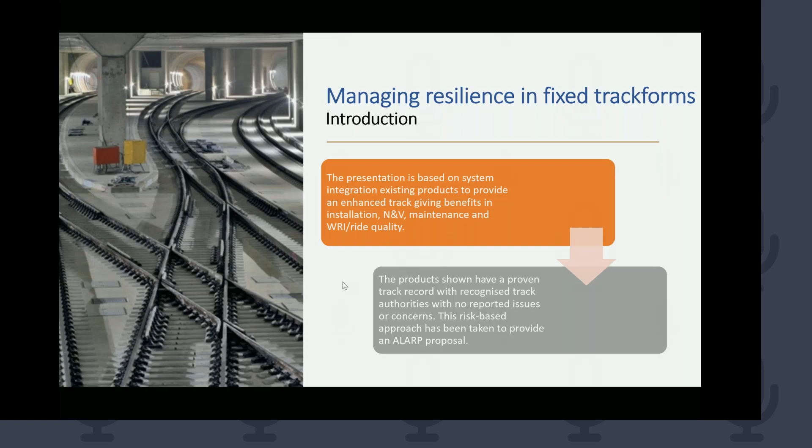Right, so what I'm going to do is an overview of the system. Basically, I'm looking at the Delkor system because, A, they pay wages, being brutal about it, and B, it appeared to be the best one when we reviewed it on LU at the time.

So what we're looking at here is based on integrating existing products. All the stuff out there is proven, and making it better, making the railway better, both in noise and vibration, maintenance, ride and quality. As I said, they've got a proven track history, so most of this stuff is well known worldwide.

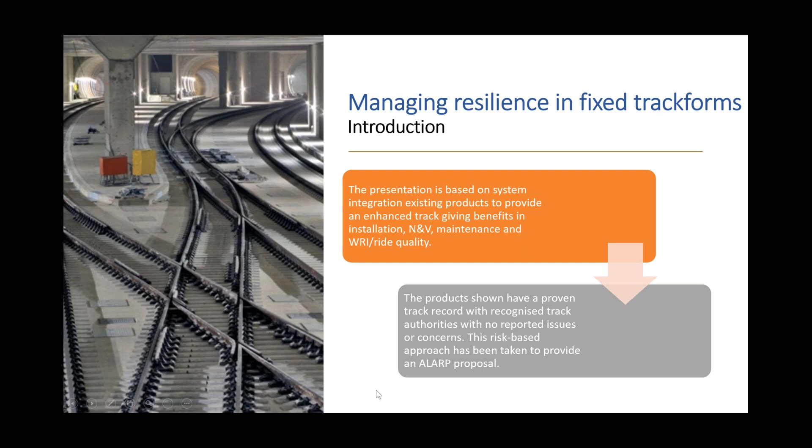Right, if I can get my computer to click in. Right, so I'm going to whiz through the vibration side of it pretty quick because that's something that should be well known to a lot of people, and then I will go through the other bits that we tend to forget about: resilience, how to look at stress, how to manage between different track forms, interfacing into legacy, and the maintenance liability that we've got.

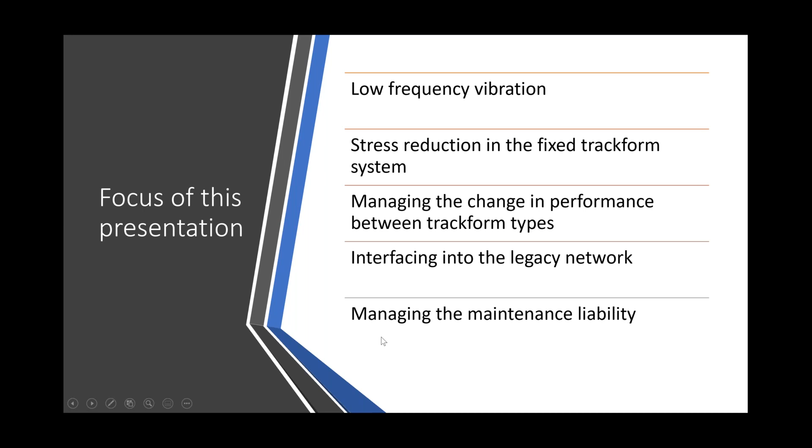This is a basic overview of what we've got in the way of different types of vibration. There's primarily two types: airborne noise, which is your wheel squeal type, which is a high frequency. Resilience won't manage that to any great extent, but the big one is structural borne vibration.

That tends to go through the clays or the concrete into the foundations of properties, and then the property acts effectively as a loudspeaker, and you get this low dull rumble, which since the advent of Crossrail and setting the bar really high has become a major problem within the urban area.

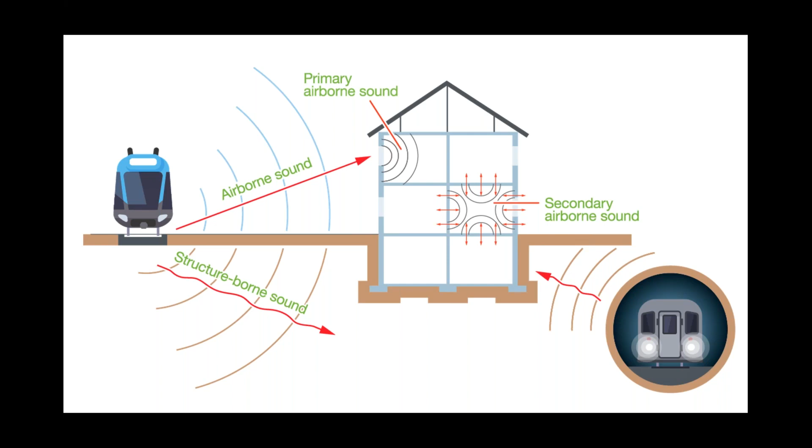Just some idea of the cost of it. We all know the cost of on-site issues on rail management, trying to keep your alignment and rail head profile in a good condition to reduce the input factors. But the legal cost is starting to become a major issue on this.

The 35 dB on that graph, you can just about hear it in a basement, and as it goes up through to 55, that will be a real painful noise. The magnitude increase is vast.

Obviously, the legal cost depends on the area you're working in. West End of London, that can be in the millions, whereas some of the less affluent areas, obviously the cost will be less. But it is a major problem on this, and we should start factoring this cost into our renewals, because it does have a big effect on the global business, not just the localized maintainer.

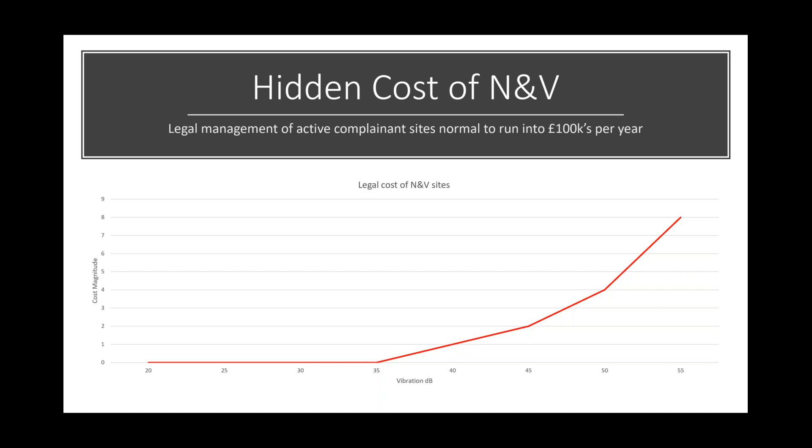A quick review of what's out there. So direct fixation would be your standard PACT track type arrangement, or a concrete in base plate. Basically doesn't give you a lot, as you would expect. Embedded rail, which is the Edilon type of system, and tram type system, will give you circa 5 dB. It does have a bit of disbenefit on airborne noise because of reflection.

And then we come down to the compressive type base plates, and the Sonneville type system. You can generally get about 10 dB, and then we go to the resilient Lord egg, Cologne egg type arrangement, which we have got down to about 14. And then after that, we go to the two types of floating slab track.

Generally, base plated type systems, you can usually get the price about the same. So when you get a real magnitude shift in cost is when you go to floating slab track, both in maintenance liability and one-off installation costs. So it's worth thinking about what you're doing there, but you've also got to align this into the system.

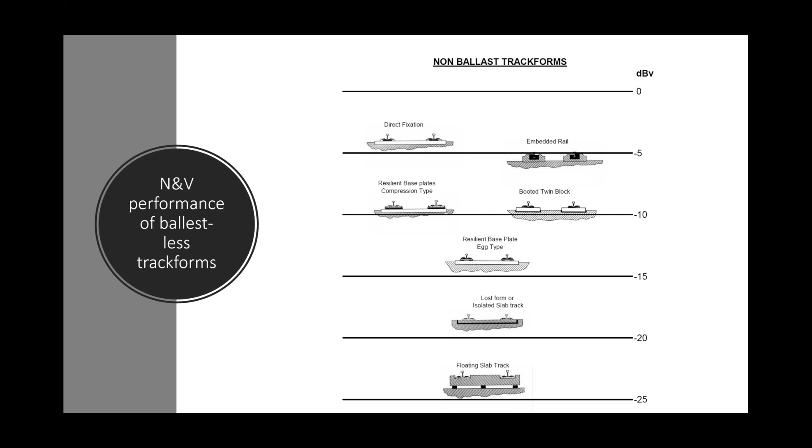So, right, managing the resilience in the rail system. So you have a rail, obviously, and you not only want to get your noise and vibration down to reduce the input factors into your vibration modeling, but you also want to understand what it's doing to your system and ensure that we don't end up with a heavy liability of maintenance or major renewal costs at an early date.

So, as an industry, we're pretty poor actually at looking at resilience. We tend to think of it as the rail only going up and down, and experience has shown the tube network has been a brutal area to try things like this, because the sharp curvature, compromised transitions, etc., do bring out faults really quickly.

So you've got to look at the lateral forces, lateral movement as well. The other thing you've got to look at is preload of the system. If you get a very soft bit of rubber and then put 14 kilonewtons on it, you've obviously lost a lot of the effect of it, so you're taking out a lot of the use that rubber can give you.

It also has an unwanted effect that we experience quite often on some systems, where because you put a preload on the rail, you've taken out that initial compression. So with a system like this, you end up increasing the bend radius from about 2 to 3 meters up to 8 or 9 meters.

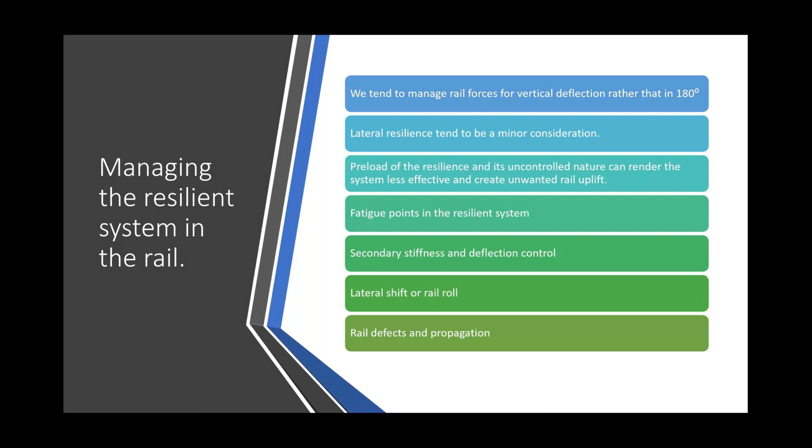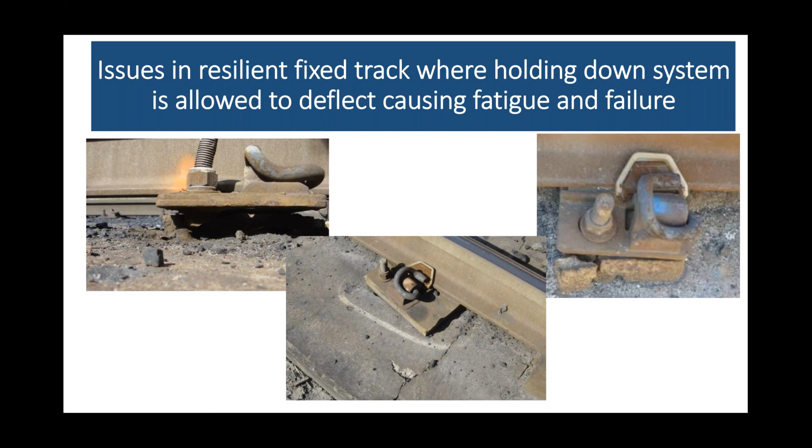The next slide is a classic which we've probably all seen, anybody who's worked with slab track. In this one, I think it's in Germany, they had a 15mm pad in there - it's literally destroyed the pad. The bolts, you can obviously see, are completely under fatigue and the concrete's broken. The other failure mode we get quite often is that the clip fails because you're overstressing it. This is what I was talking about with fatigue points going through and managing your lateral resilience. Unfortunately, being a fatigue cycle, it all tends to happen at the same time - so we don't just get a one-off break, we tend to get what we call an unzipping effect.

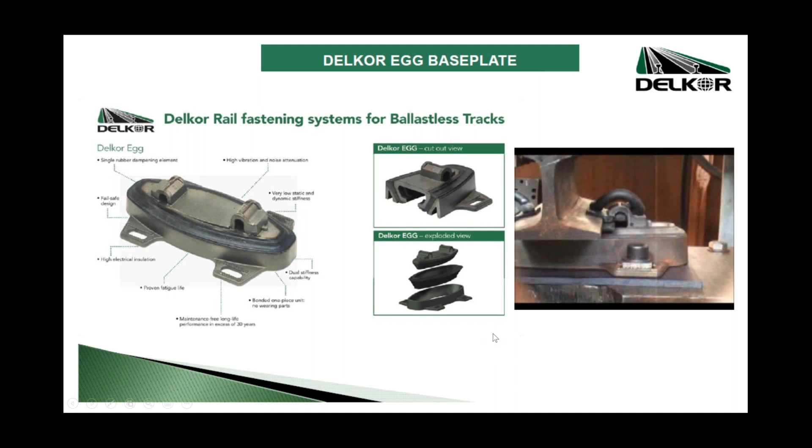Plunked on a 200-meter radius curve, it's performing really well. But the next stage up, really, so that the Delkors can meet the requirement, is a pure compression plate.

Again, it's a two-part system, so you've got the top metal plate and the bottom outer ring of metal, and then you've got the rubber that is bonded to it, chemically bonded to it, in the same process that you do bridge bearings.

You don't get quite as good vibration attenuation on it because it's a compression plate rather than working in shear, but it's pretty good because you've got no preload on it. It's a captive type arrangement, so in the very rare event that something does go wrong, which I've never heard of, it won't pop out of its system because you've got the ears that curl over the top.

As far as the track guys are concerned, it is basically a base plate. There is nothing else in it, nothing else to do to it. It's just screw down and go for it.

It's in Australia where they first produced this one. It's been in service on, I think, 40 million ton per annum, 35 ton axle load, no issues. So it's got very low cost.

The Americans are using it as well. They put it on their test track and can't break it either, which is quite good. The stiffness goes down to about 16, but that's stock dependent.

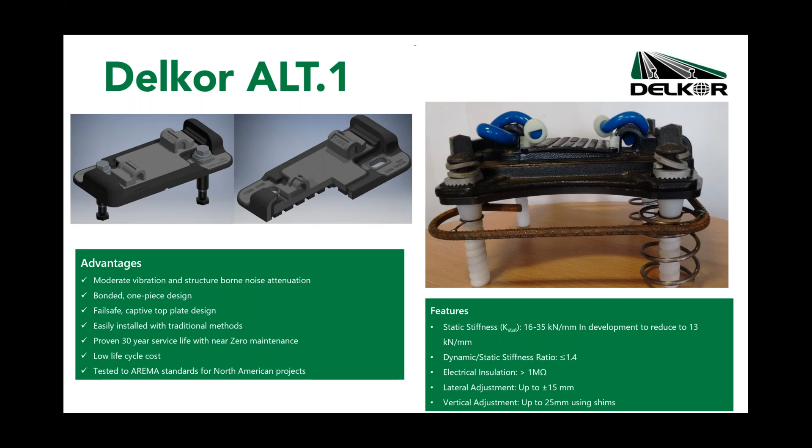I've gone over most of this, but I just revised no fatigue point, which is one thing. Again, this is dual resilience, so once you get to a certain point, the rubber won't compress any further. That's both laterally and vertically, so it just goes solid. Again, it won't affect the plate. If you run a 35 ton axle load over it, it just doesn't operate to its performance criteria.

We reduce peak loading by the load share. As I said earlier about the bend radius, you can actually get the loadings down to about 40% over the wheel. It's natural rubber, so it gets stiffer with age.

So although the performance will degrade in time, you're normally looking at getting 40 years plus out of it. It stiffens, so there's no safety risk in it going too floppy.

The whole system was designed using existing tooling, so we keep the same maintenance process and reduce the interventions because we've got the reduced stresses. It's 40 years in places.

DLR, we took some out, did some testing on them. I think they've been in about 32 years around Canary Wharf, and I think the degradation was about 4%. We allow 10%, so yeah, there's massive life still left in those, so they're still going well.

N&V performance, we can tailor it. Obviously, dedicated stock, it's very good. When you get mixed traffic, you've got to compromise a bit, but we can still get a very good performance. And it's very compact and ideal for constrained railways. In fact, with LU, we couldn't actually fit anything else in.

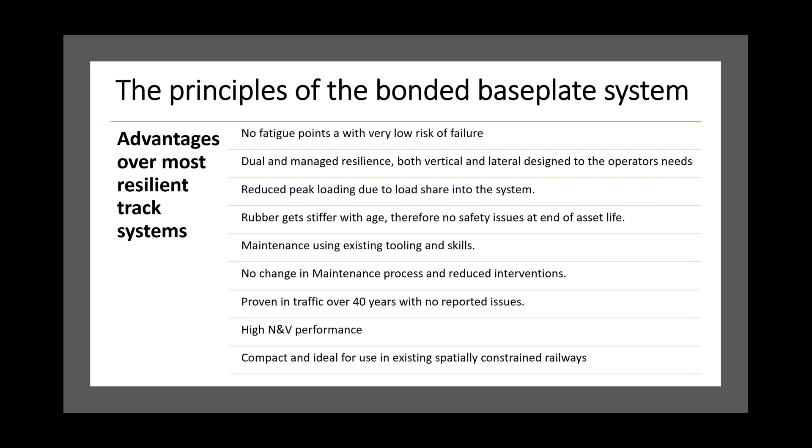This is a slide. I won't go through it in detail because it's a bit heavy on the eye. It's a good one to go through afterwards.

You've got the checklist, which is your input parameters up in the top, so you put all your track details and vehicle data in. The calculation results will give you that deflection curve. This particular one was done to fault mode criteria to work out the worst case scenario. So that is worst case scenario.

Don't take that as a given that you're going to get 2.5 millimeters deflection. You're not, you're going to get probably about 1.5 mils, which is perfectly acceptable under a bend radius of 5 or 6 meters. No problems. This is a relatively soft one, 13 kilonewtons per millimeter.

If you look on the line from the side coming down there, nominally 63 is the frequency, which is 47 on that, giving you an absolute insertion loss of 10. So it's pretty good, it's up there with the best of them. But I'm not going to go into details, otherwise I'll bore you to tears.

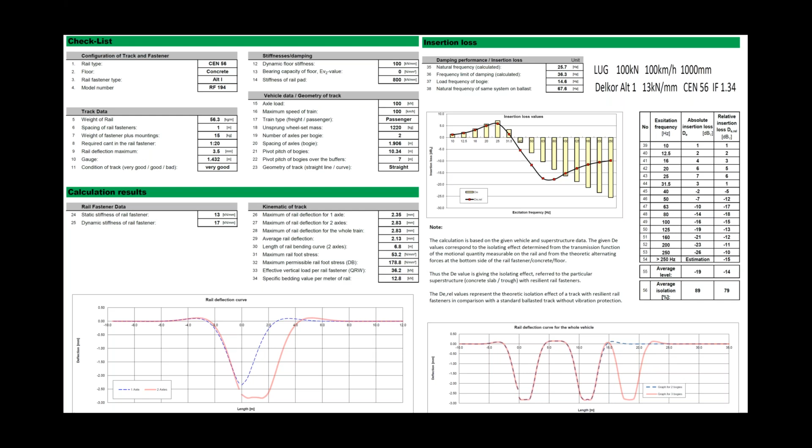As I was saying about the bend radius, this is what you see under a base plate. This is indicative, it will change with how you do it, with load and stiffness, but it's not unusual to get well below 50% by increasing your bend radius. Normally in a base plated system with a conventional EVA pad, you'd be looking at about 75-80% on one, and then the residual going between the two.

On some of the softer systems, we can go out to about 6 plates either side of it by utilizing that, which shows that you can get your fatigue loading right down, which is one of the aims we need to do - to keep that fatigue loading low so that we increase the life of our asset.

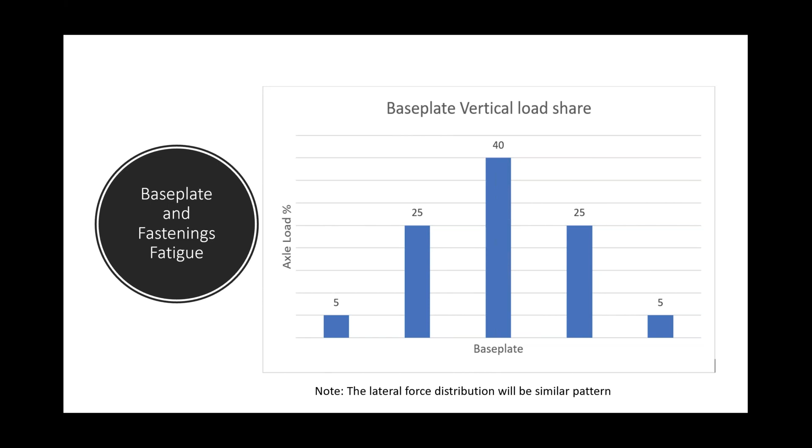I did cheat on this one and just copy it in. So what you've got is the vertical forces, they go through the top plate into the rubber. Because the rubber is resting on the concrete base or whatever your formation is, you create a really high friction on that concrete, and that holds all your lateral forces.

So we've reduced the lateral forces, plus by pummeling that rubber down on top of the concrete, we're actually holding most of our lateral forces from going through the bottom plate. So we are keeping the fatigue out of there.

We did some FEA, and on the central line we modeled Caxton curve, which is a 60-meter radius curve - I'm trying to think what speed it was, but I can't remember. What we found was on this 60-meter radius curve with central line stock, which is horrible for track, we actually still found that the preload from the bolts was causing more stresses than the train going over it. So that was very reassuring, compared with the legacy system where we were getting something like 100 kilonewtons going down in the system.

And effectively the whole bolts were under fatigue straight away. The rail fastening system, whatever you have on top, it actually gets a lot less stress because you're not rolling the rail over, you're laterally shifting it in rubber. So you'll find that whether it's a bullet system, Pandrol or Vossloh, you won't get any faults in there. They would last for donkey's years.

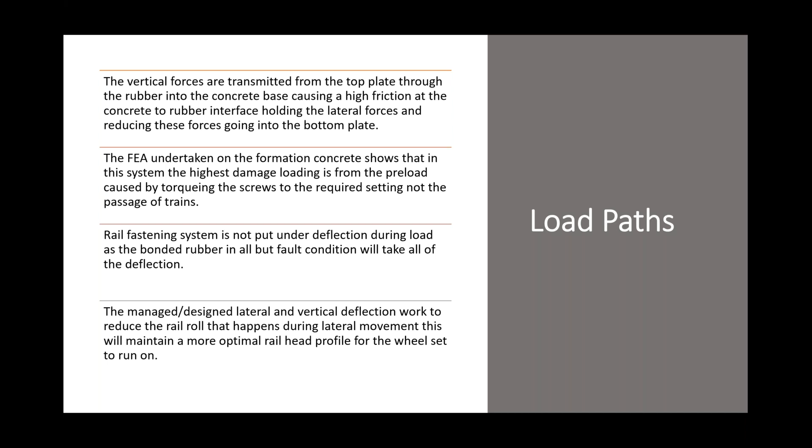With the lateral movement, obviously, it's going across, you maintain your railhead profile a lot better. As I said before, you tend to find on this system - it's a very big subject to go into, but I will just touch on it - because you're damping everything out, the railhead damage generally is reduced.

There are certain conditions if you mix up natural frequencies, which will happen with any track form, where you can get problems. But again, that comes down to something which, as a system, we need to look at and assess beforehand. Sometimes you're led into it and you just can't avoid it. But it's unusual, and it's only happened to me once on the central line, and that was due to conditions. But there are ways that we can play with that in the longer term.

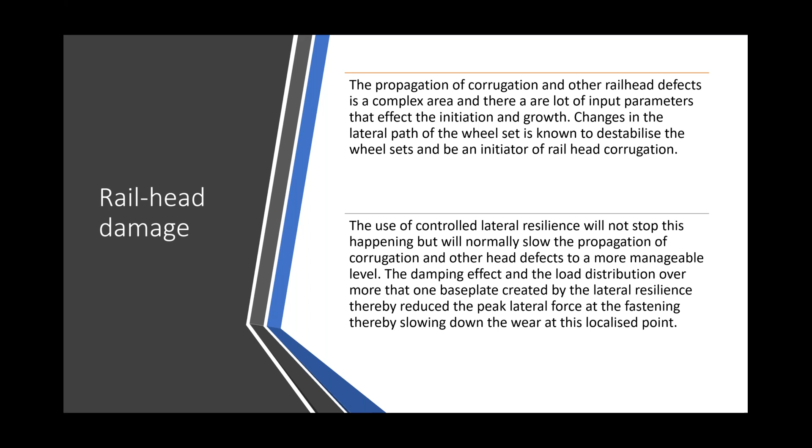The other thing coming from resilient systems is, you want to manage your stiffness back out again. There's no point putting a lovely new system in that manages all your stiffnesses, and then you get back to your traditional system and go wallop straight back in, and just move your maintenance liability from one area to another.

This was done in Australia, I think it was in the 90s, hence the PPE is a bit more lax than we would see nowadays. So you can see what they've got there - they're running out the Delkors off the bridge and then into the PNC sleepers, which have different stiffnesses of rubber to slowly manage the stiffness back out.

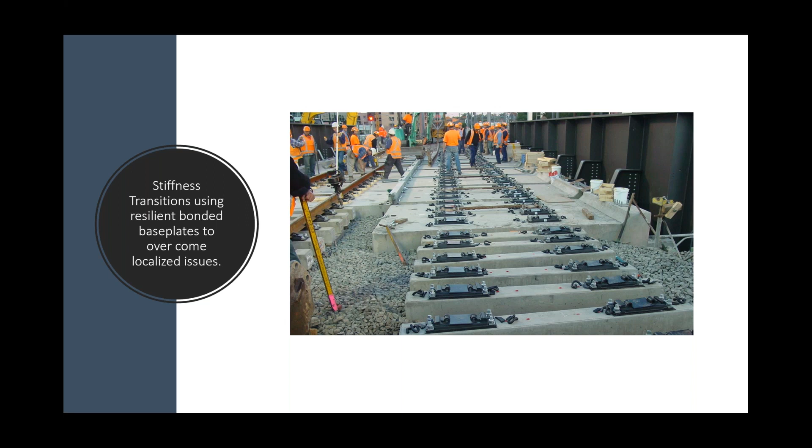This is what we designed on LU. The LU design section came up with this, and so what we've got here is a selection. We come off the track form with the 20 kilonewtons, and then you have a section of 22 kilonewtons on very wide concrete sleepers that then go into 30 kilonewtons and then run it out through.

The idea is that we use a bend radius to change the stiffness, so we don't have to change every single base plate. We can use the rail to assist us in that. As it goes through, we get a slightly different stiffness as it runs through, and we can run it through and keep our rate of change of deflection down to a minimum.

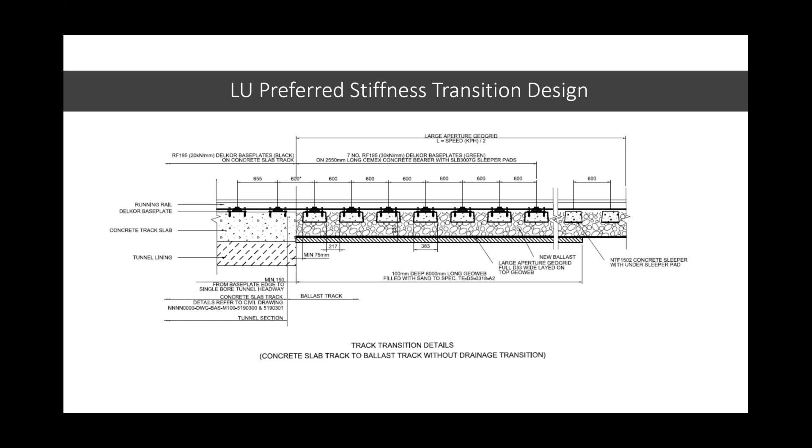One thing which we have to remember is that it's speed related. So the faster you go, the more you got to put in there because it's rate of change per second. The advantage of these stiffness transitions is that there's no intrusive works.

You bring it all on site as you would as a panel, dump it in there. We tend to put a few geo cells in there for belt and braces, but basically we're not gonna rip out, have major concrete structures under there. It's all up and above the sleeper that's the bit that's moving, so that's where we keep it out of the way.

We've got a wide sleeper, so that helps as well. And the other thing is that there is a great love of changing the stiffness on a slab track, where it does seem a bit naive to me that you spend all that money working out what's the optimum for your slab track, and then the most critical bit is the end, and then you start playing with the stiffness on the end. So I always prefer to run it out and then change it back into an area outside of that, in the ballasted area, where you've got a bit more control, especially if you've got noise and vibration, because you stiffen it up on the end, and that then just livens the whole slab up.

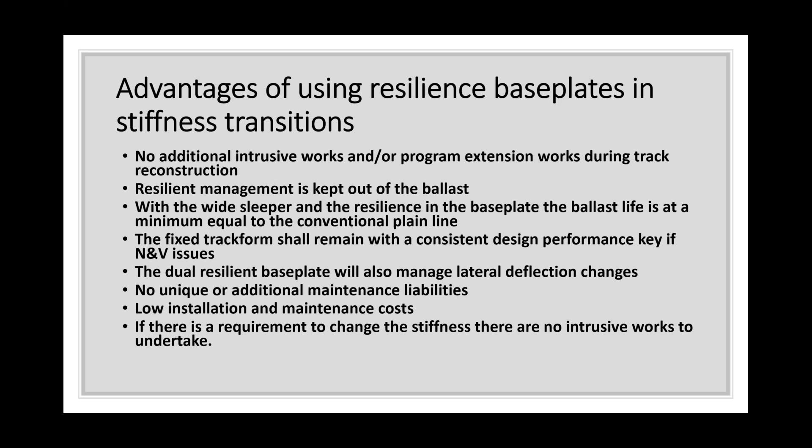Here are two that we've done on two different networks. The dark fadey picture is on the Metline. I think that's been about 5 years. As far as I'm aware, I did ask the other day, no issues. The other one, which is obviously a lot longer, is on near Canterbury, River Stour. That was put in May. We did some vibration testing the other day, and it's performing well. So they're the two types we do: mainline operator, mixed traffic, and dedicated LU stock, S-stock.

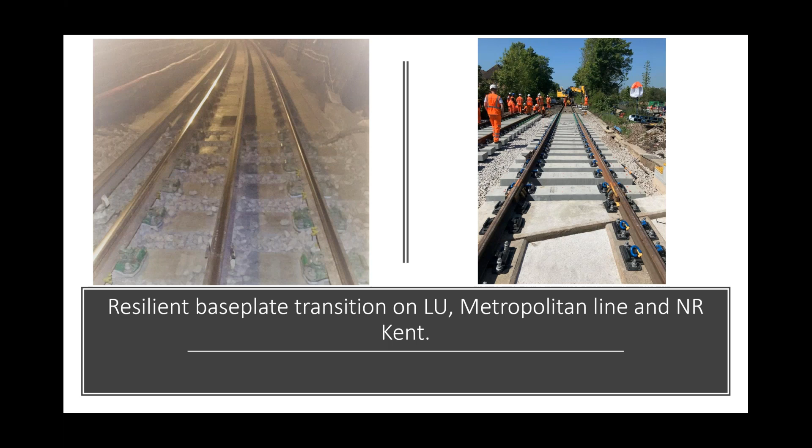The other area of fixed track forms that we sort of see coming to the fore at the moment, where we're changing from softwood stroke hardwoods to FFU, or hopefully at some time move away from FFU to concretes and steel. This particular picture is Sydney Harbour Bridge. It was done in the 90s. Again, it's just up for replacement because the timber underneath it was failing, not the system on top of it, and it's a line system upgrade. So at the same time, they're changing the base plates.

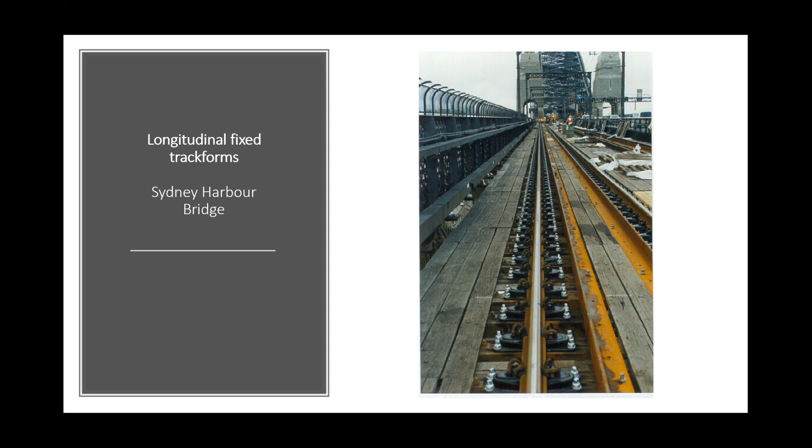Historically, we always used to have marine softwood, brilliant timber. Used to last for donkey's years, and it was also quite flexible. With the demise of good quality softwood, we moved to hardwood, and latterly to a plastic composite or FFUs. This is Network Rail, using extremely stiff, completely different sort of way it reacts with the chair screw.

And they do suffer from, when you have peak forces, the screws do tend to fail, or if in hardwood, the top surface of the timber starts to fail and the holes go oval. I think anybody who's worked with long timber bridges will know they have their own anomalies and history of failures, etc. And the peak forces do tend to overcome the friction between the base plate and cause screw failures, etc.

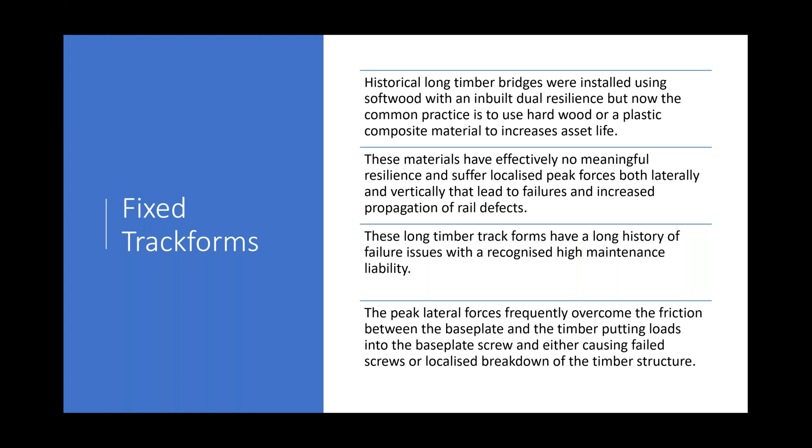So by using resilience, especially with the lateral resilience, we do load share laterally as well as vertically, so we can actually reduce the forces going in. And again, as I said before, the vertical forces do actually compress straight into the timber stroke composite, creating high friction and therefore reducing the force in the screw.

I'm a great advocate of looking at replacing timbers with steel or concrete to get a structural form. It tends to be awkward because it's a multidiscipline design, as it brings the civils guys into it.

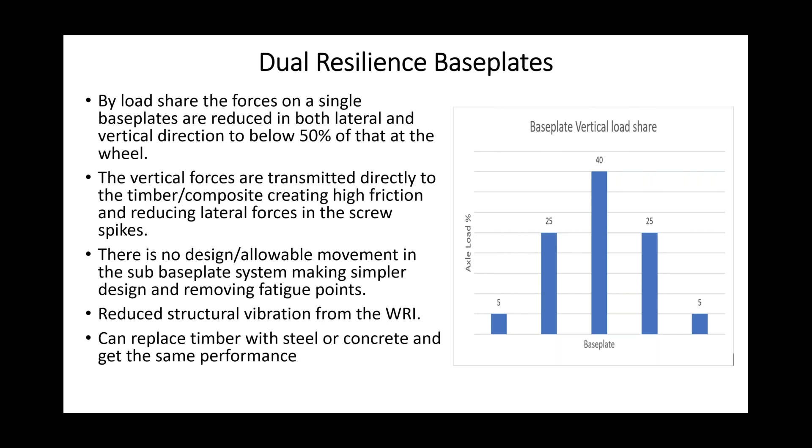I know it's been done with the Viper system, and I think that's working pretty well on a few of the bridges. I haven't heard any major issues, but with the cost of FFU and the lead times, I am seeing projects coming on for FFU being replaced with timber because they can't get the FFU.

We end up with a bit of a compromise design solution at the end of it. The use of resilience in conjunction with stiffness transition does give you an enhanced solution. You usually get a better cost out of it as well, and we're also looking at keeping your maintenance liability down.

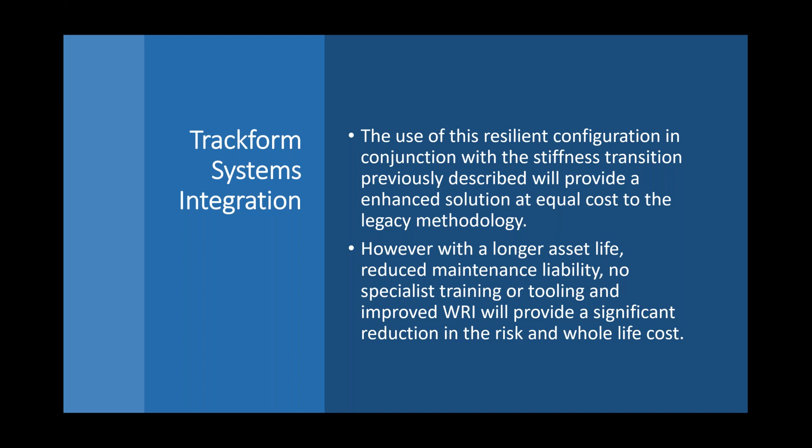This is really going off piste, but I'll talk about some work we did with LU. With the check sleeper arrangement, since we've gone away from bullhead we've ended up with a very good system, but it does suffer from issues of fastening systems to the concrete or the timber.

Because of its stiffness, one of the things we looked at within LU was providing a resilient system on a concrete sleeper, so that we could again use that bend radius to reduce the peak loading in the system.

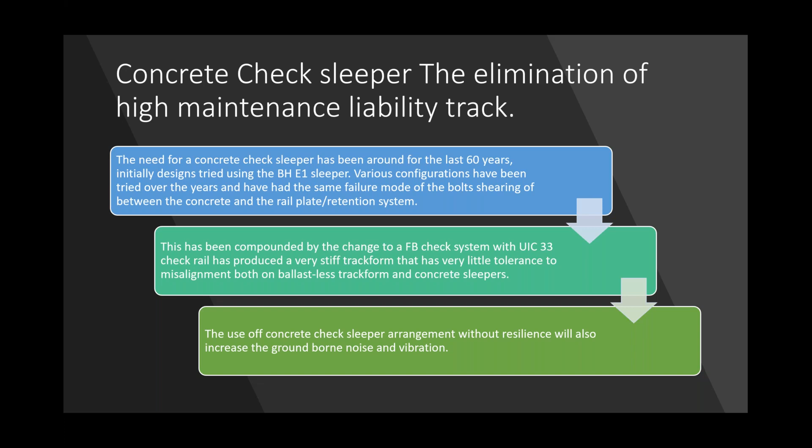This was our first trial effort, which worked well. I think it went in about 7 or 8 years ago, and as far as I'm aware, apart from its follow-up tamp, it hasn't shifted.

We've also used this in my days in LU on the deep tube. I think the tightest radius we got down to was a 90-meter radius curve. Every site was handed back with very little defects, which wasn't always the case before when the maintainer wouldn't accept it.

To my knowledge, because nobody's moaned at me yet, they're all performing well with no issues. If there are problems, please somebody get in touch with me.

What we did here, we integrated the Schwihag top plate - I worked with Schwihag and Pandrol to get this design, and then integrated it into the Delkor base. So we kept the known system of the Schwihag, and we balanced the loads between the Schwihag clip and the Pandrol clip to get an equal toe load, then put it on a Delkor-type system.

There's quite a lot of these on the system now, and it's actually one of the few resilient plates made in the UK - there's a Czech one too, so that's quite a novelty nowadays.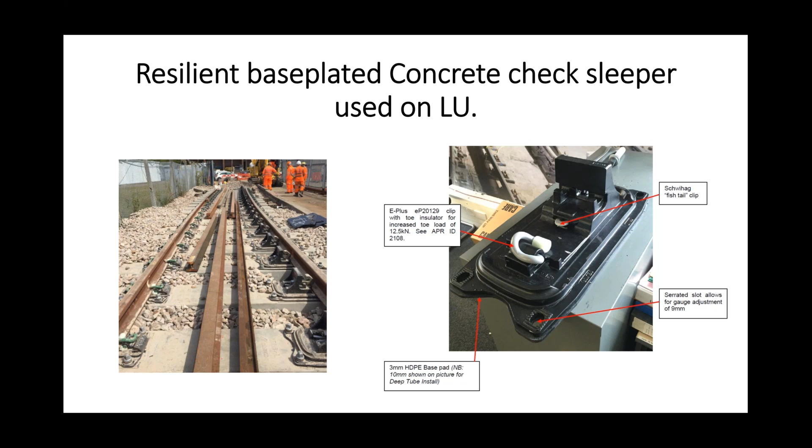We're looking to increase the asset life on this from the nominal half-life you'd expect out of a check curve compared with the plain line curve. We're hoping to double it, reduce railhead damage or the speed it appears, and share load between sleepers, meaning laterally we can hold our alignment a lot better.

We're using the big sleepers again, so with the reduced loading and the big sleeper, ballast should get a hell of a lot more life out of it. With the degradation of the geometry being slower, derailment risks are reduced significantly.

Maintenance is maintained as we do now. The need for lateral end plates and things like that is reduced because you've got the load share, so you're not peak loading the ballast. The installation methodology is unchanged.

It's just a heavier sleeper, which means you need a bigger digger or you lift fewer sleepers at a time. It does frighten off project managers, but we found actually it was easier to install than the conventional system.

We also build in an allowance for flangeway gap and track gauge change requirements for different systems. So the upstand on the check is allowed to be milled to a certain amount, so we can optimize the flangeway gap to the system on the railway.

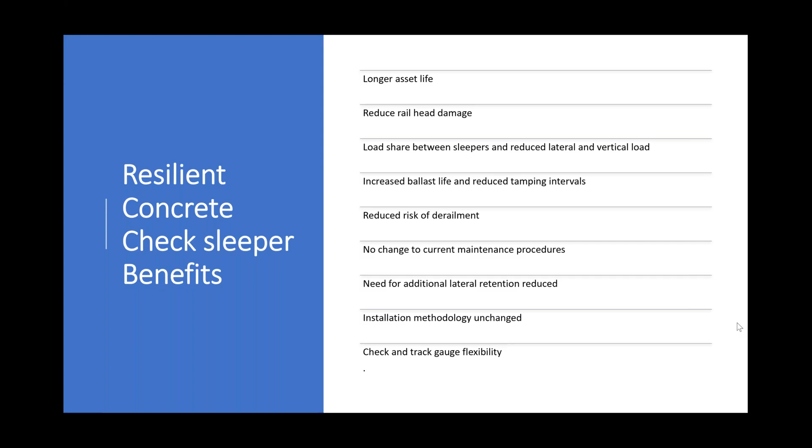The difficulty we have with signals is they can't understand that the movement you get is the worst movement you'll ever see, because they're used to it being fixed and then slowly degrading. Whereas with a resilient track form, you get the highest movement at the start, unless something goes drastically wrong - which generally means the least of your problems is the point motor not working, and it's probably beneficial if it does fail and stops traffic. But really, it's a non-issue.

But we are struggling a bit with that, and I think we probably have to go to some more novel solutions in time to come. In the constraints of the deep tube, it was getting very difficult.

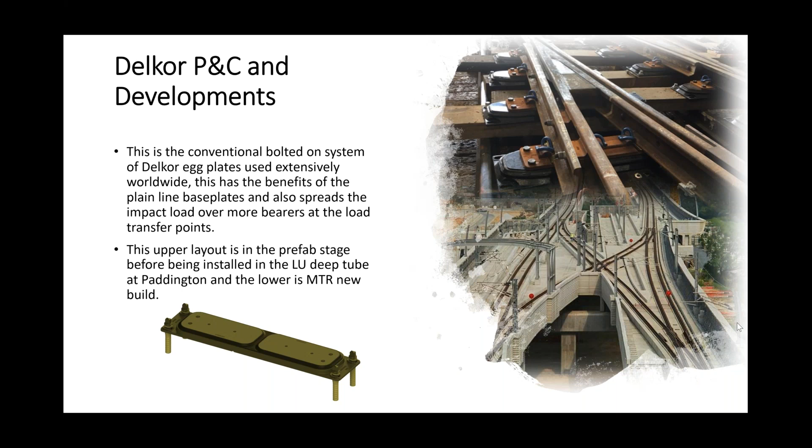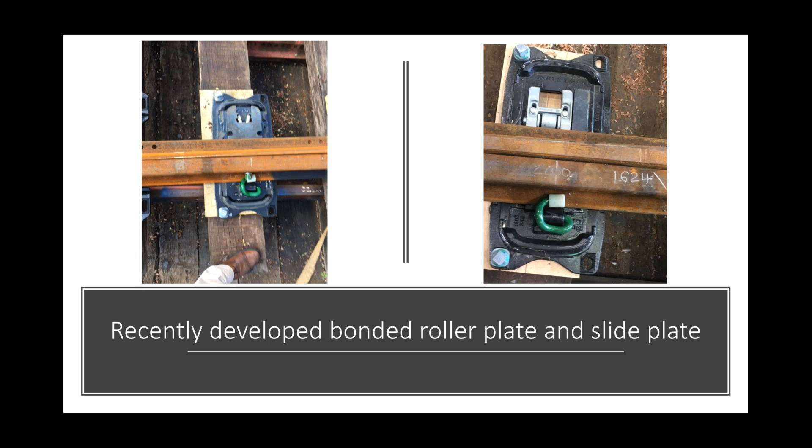The other thing we interface with is the Edilon crossing. It's a complex arrangement, but the Edilon products are supplied by the James Walker Group, which is also part of the supply chain for Delkor. So I got dragged in by the overarching company to work out a systems design, because what they were finding is they were putting in the Edilon level crossings, but moving the maintenance liability from the level crossing to the transitions.

So we worked out by using the transitions you've already seen that we could actually reduce the maintenance liability and keep the liability of the transitions down to the same as that of the plain line around it. So it worked really well.

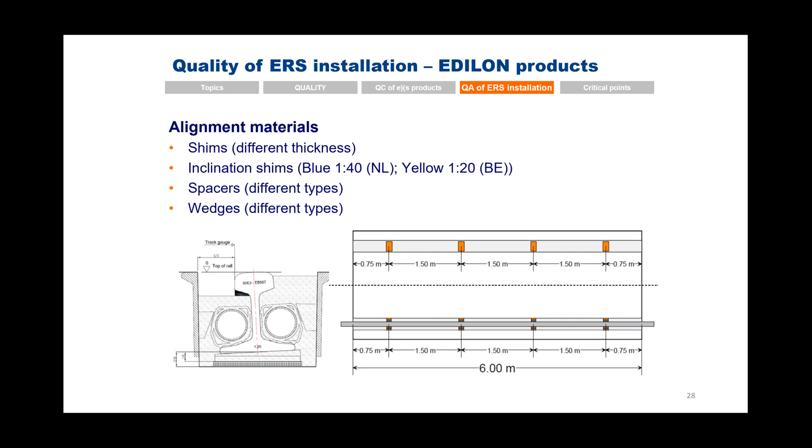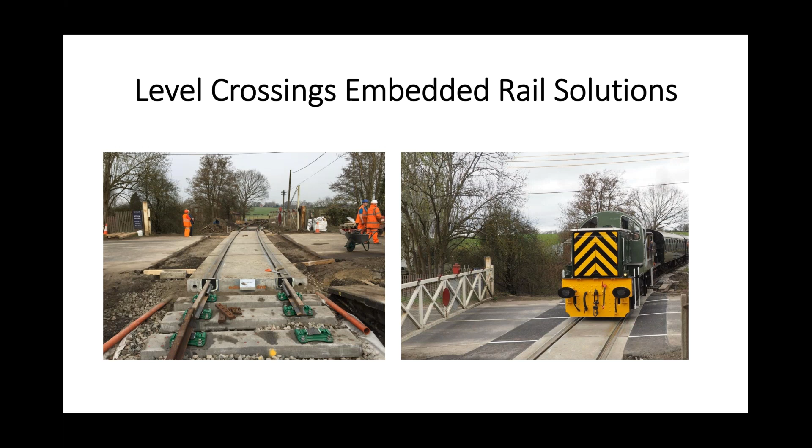Right, well, that's a quick fly through. I apologise for the speed it went through. There's a lot of subjects here, and I'm more than happy to take some of these subjects and either go in depth with you guys depending on what you want to hear, or do a version 2 of it and go into more detail and look at more projects.

So really, it's just over to you guys - are there any questions, anything you'd like to talk about? Obviously, I've got my details on the slides, so if you want to go offline, you can just give us a call sometime and we can discuss whatever.